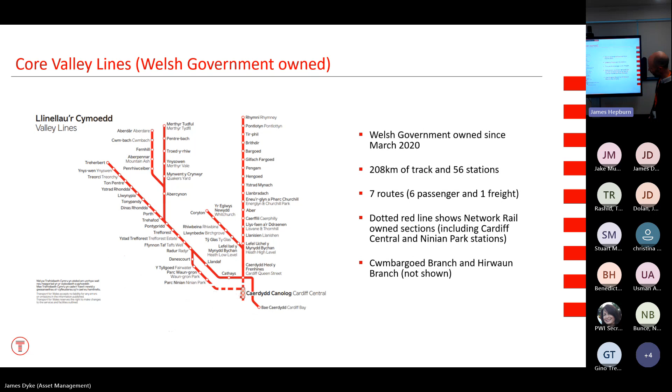So obviously managing earthworks is mainly about maintaining their stability fundamentally. And the 3 main threats to that stability could be summarised like this. 2 of those are obviously water. You could argue 3 of them are. Perhaps the main external threat to the railway from third parties is mainly around drainage inflow and management or otherwise of incoming drainage.

But on top of that, obviously there's climate change. Not going to go too much into detail about that, but I suppose the concern with climate change is that more extreme weather is going to result in more rainfall fundamentally.

So there's that, but there has also recently emerged a body of research funded by Network Rail and other asset owners that says that increased seasonal fluctuations of temperature will drive greater fluctuation in groundwater pressures, and that greater seasonal fluctuation in groundwater pressure will actually cause the materials themselves to deteriorate and weaken over time. So climate change acts to amplify the forces that drive instability, but also to diminish the forces that resist it. The soil strength, essentially.

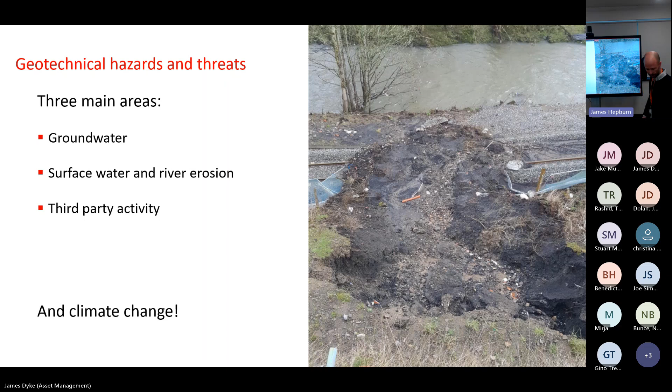So obviously it rains a lot in the upland areas of Wales. TFW's 1,500 odd earthwork assets are all going to be exposed to waters trying to get from the upland areas to the rivers, and they've got to cross the railway to get there. So, we don't necessarily have a huge range of geotechnical problems, not like you might see in other bigger regions, but the extent of our asset that is affected by water, and is vulnerable to the instability it drives, is quite wide.

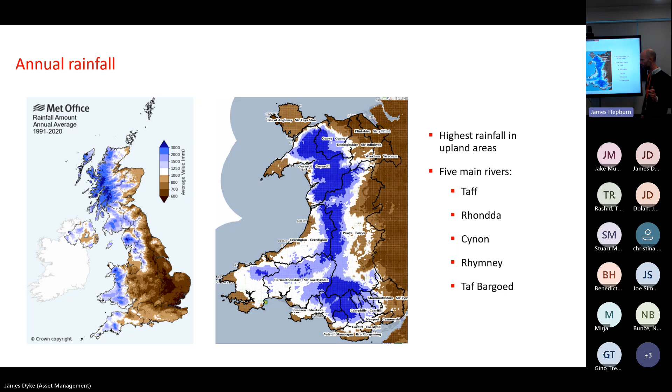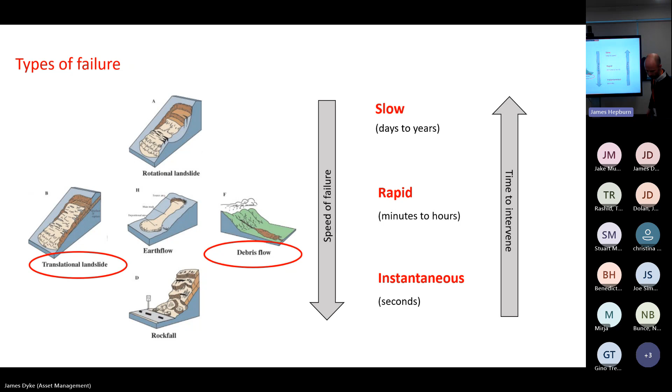So obviously the main threat is water, but understanding where that threat exists is one half of the problem. The other half is understanding which of your assets are most vulnerable, really. So in turn, when we think about vulnerability, we're interested really in what's the stability of the earthwork. In design terms, we assess stability using soil mechanics theory to determine a factor of safety, and obviously that requires an awful lot of very expensive data, which is obviously not something that's within reach.

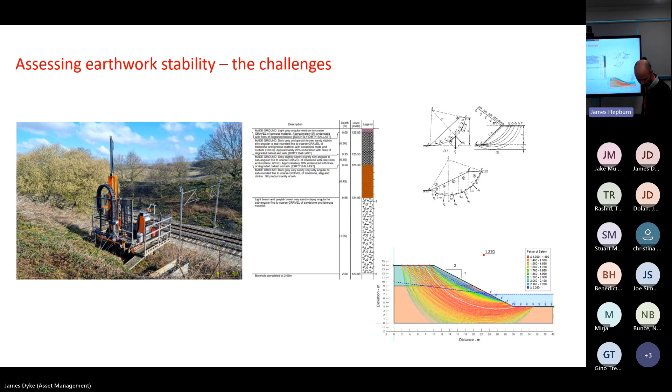So that's really the challenge. So the big difficulty really in understanding what's below surface, and therefore how your earthworks are going to behave, is one that's compounded by the variability that exists within the earthworks.

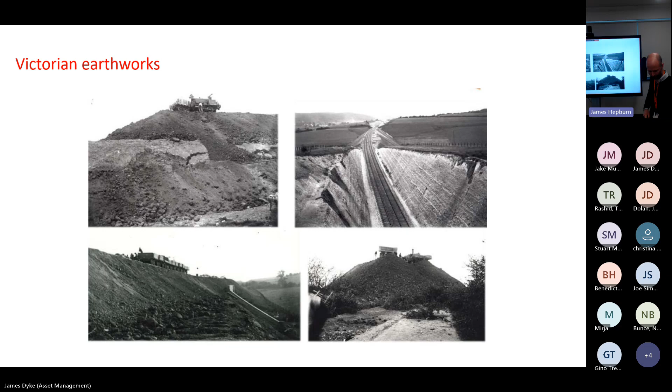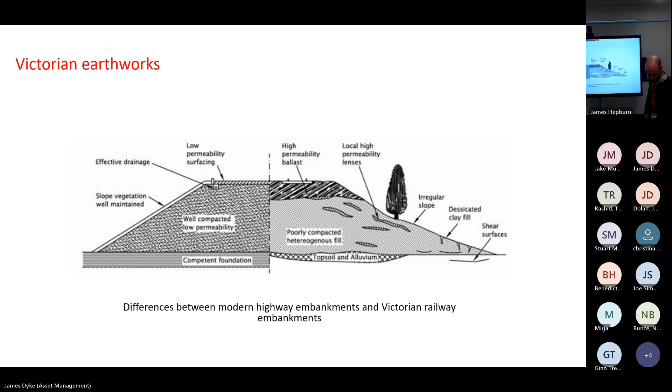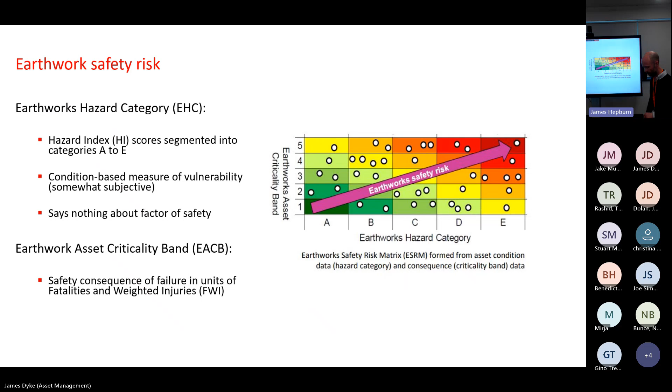So earthwork hazard category is determined or calculated based on an asset's characteristics, its attributes. That might be fixed attributes, the geology, the slope angle, the height, fundamentally the two most important determiners of how stable your earthwork is. But obviously then there are other condition-based factors that come into it, the ones that are most indicative of something being fairly problematic. Movement indicators, and obviously you've got drainage there. It's there for a reason largely, to control either pore pressures or surface waters. An indicator that there's a threat there.

So each of these attributes then will score according to how important they are as precursor indicators of failure. And there's statistics behind this in how important these are statistically in the failure record. From that data we determine the weighting that each parameter is given, and then the earthwork is scored accordingly, and it puts you somewhere on the scale A to E, from best to worst condition.

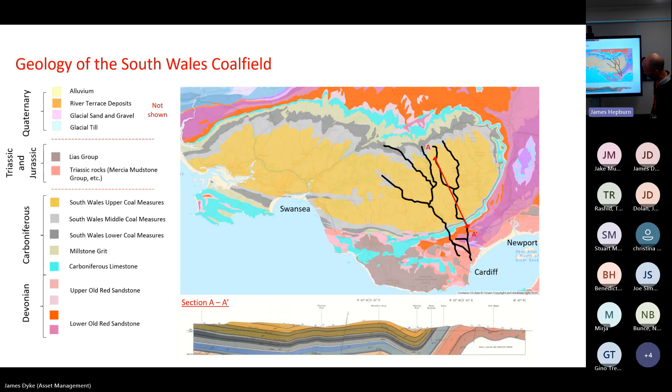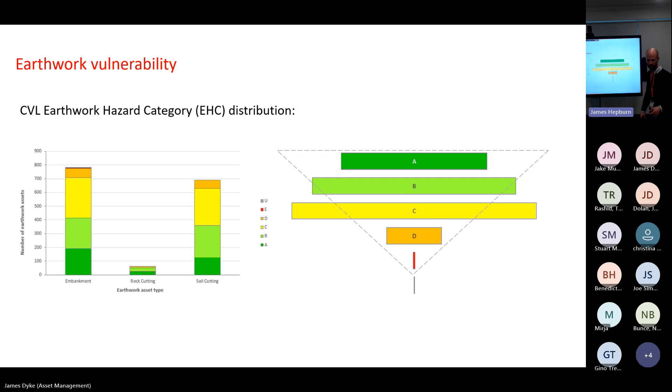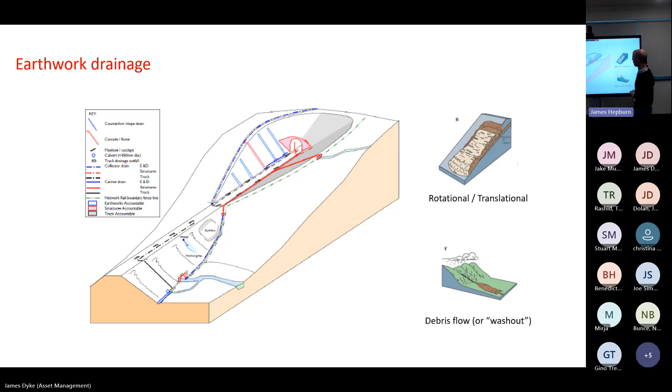Drainage is vitally important. If you've got drainage in place on your earthwork, then it's generally an indicator that there's a vulnerability there. All of these drainage features here are going to be pretty critical for controlling stability and limiting the risk of this type of failure happening. We've got crest drainage, which would partly be to control groundwater and intercept surface water, counterfort drains on the slope to limit pore pressures, and under-track crossings, which are fairly critical to the integrity of your embankment. And if it's sidelong ground, as exists mostly in the valleys, the upslope drainage at toe level would be pretty important as well. So just a few examples of the sorts of problems that we've had, perhaps before we took the asset on in this case, but since as well.

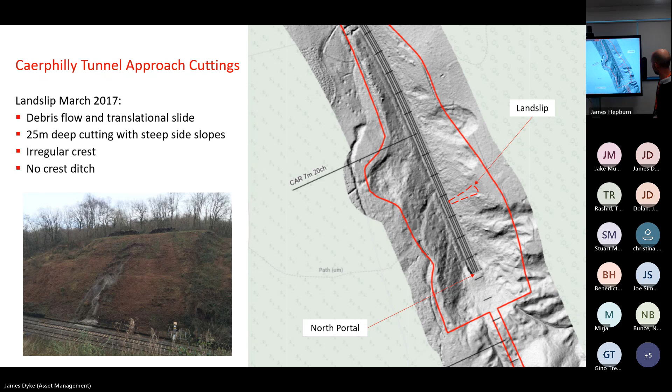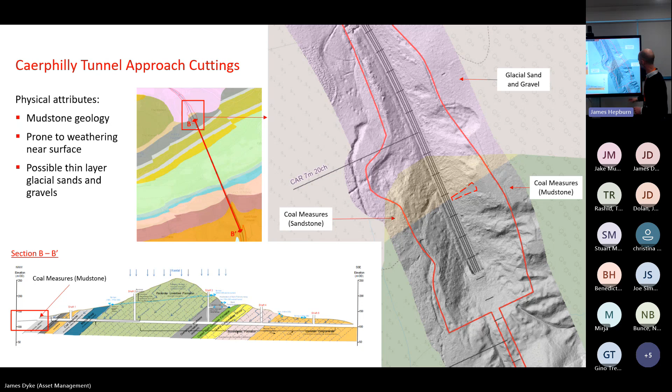Mudstones are quite prone to weathering at their surface, and that's likely been a major factor in being vulnerable to this type of failure. We've also got some sands and gravels coming in here, possibly a thin layer over the top of the underlying geology there.

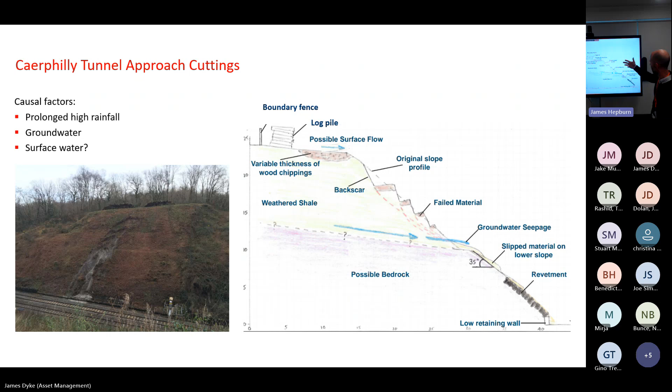The other thing to notice is these log piles here. It may not be a factor at all in this slip, but if there was a uniform flow of water towards the crest line from neighbouring land, you might think those logs could act to funnel water towards the middle part of the slip. It could just be coincidence that the slip coincides with that. But it's an indicator of other factors at or beyond the boundary that are often critical to these things happening.

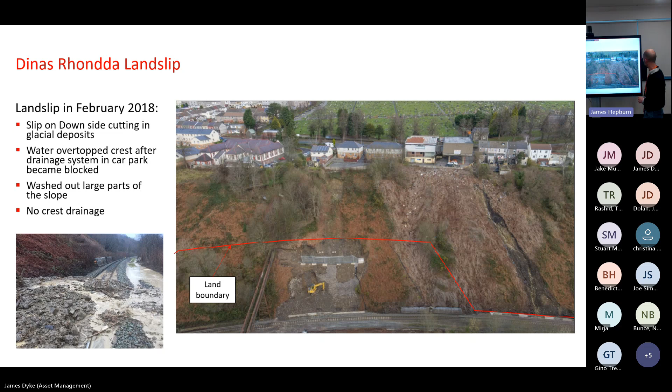The other thing, when we picked this up after we took on the asset, to try to assess the site and get a bit of an understanding of what residual risk there was after the emergency work, we could see that there were some overflows from these gullies in the car park right down to some chambers in the cess here. Sort of temporary measures really. So obviously something that, if it is needed longer term, needs formalising in some way.

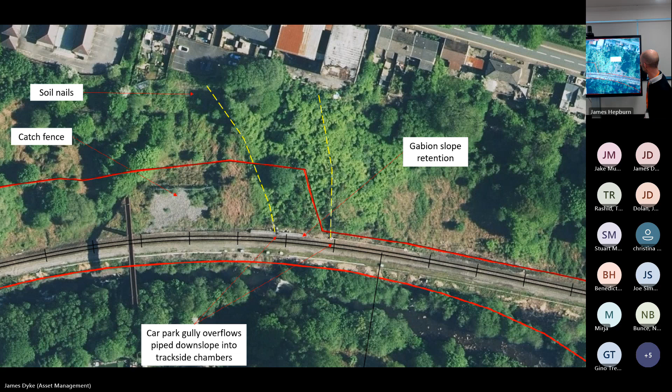So yeah, this clearly is still a difficulty in managing this site. As we looked more closely at the LiDAR, you can see that there's a sort of herringbone pattern on the middle bit of the slope there, which when you look back at early 2001, I think this aerial image comes from, you can see that this is a system of counterfort drainage, which we didn't previously know about, and wasn't in the asset records. May well date from long before 2000, 2001. Certainly doesn't look particularly new there.

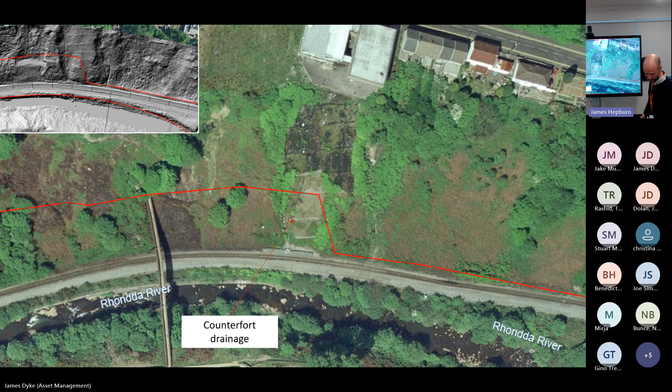So, you know, obviously they were put in for a reason. And you can imagine that drainage was, certainly at the time, considered fairly critical. One of the concerns with that type of drainage is it has a very limited lifespan. There's recent work done by the Transport Research Laboratory into how long these things can be considered functional, even with regular maintenance.

And they found that really refurbishment or replacement is necessary by the time you get to 25 years. And it's already been in that long, quite likely, with very little maintenance in that time, given that there was no record of it. So, yeah, that's obviously a concern about how we manage it going forward.

One of the important things to consider with counterfort drainage in terms of design, and also with maintenance, is what's its design function? Is it there to manage groundwater, or is it there to intercept surface water as well? You can imagine, given the nature of the site and the fact that you're having to protect against instability driven from things happening outside the boundary, it might be there to intercept surface water, so it's more important that it's kept free of vegetation, cleared of all the vegetation debris, so it doesn't get clogged at the surface.

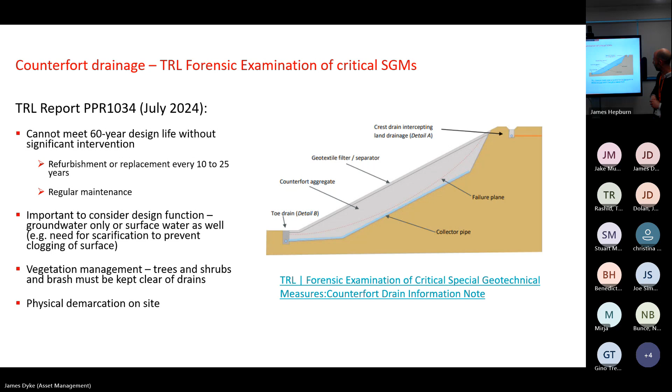This is a slip that happened in May last year. The first of May, after a prolonged period of rainfall, the first train out from the depot from Rhymney passed the slip. I don't think it had blocked the track, but there were lots of trees down with it, and the train struck a tree on the way past and damaged the unit. But thankfully, it wasn't too severe.

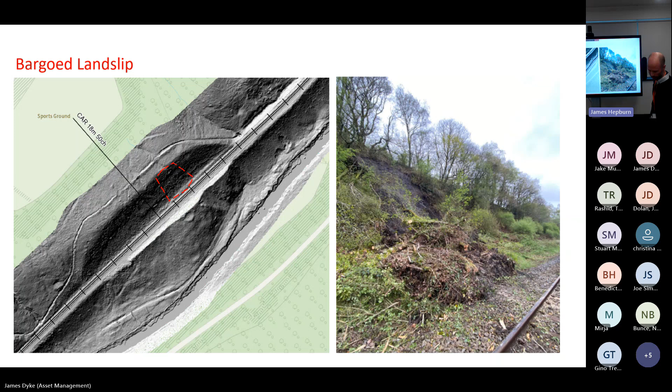The debris was cleared away, and an emergency speed restriction was put on once this crest ditch here, which you can see was hand cleared, and some barriers put out. Or rather, I think the speed restriction was put on after the debris was cleared, but it was lifted after that work was done, just to try and get the ditch flowing and to get some temporary restraints in place.

So, having a look again at the top of the slope, this crest ditch here seems fairly well defined in places on the LiDAR, but in others, really not. It's really badly degraded and heavily overgrown. Lots of trees growing out of the ditch. Again, this wasn't in the asset records, so quite likely it really hasn't had maintenance. Is it a ditch within the railway boundary? It was, yeah. The boundary is crossed just at the back of the ditch there.

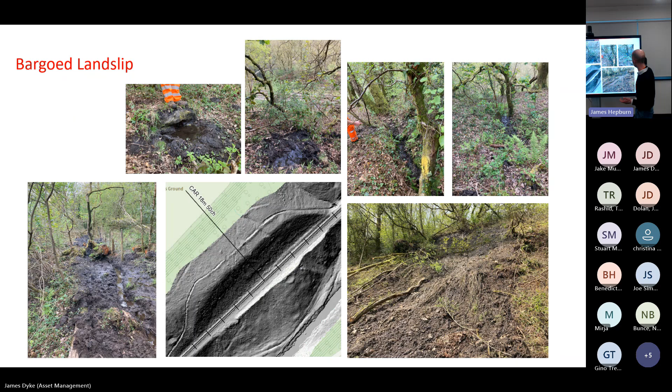We can see there's an incoming watercourse there. The intention is for this ditch to intercept that flow, but you can see that linear kind of feature extends beyond it. So there's been some overtopping there, and not just that, but there's been some quite heavy seepage below the ditch as well. So it might not just be a ditch overtopping; probably there's something else coming in as well that seems to have caused it.

So, obviously, with the importance of drainage, trying to improve the asset record of drainage, we tried to do a bit of work looking through all the records to try and identify stuff that maybe isn't formally registered as a drainage asset, to see if ultimately we can get it into the records. We've also looked at the LiDAR data, the images you saw before are quite useful for doing that, OS mapping, and just going through all of that data.

We think we've been able to identify these numbers of earthworks with suspected unregistered drainage, the dark blue ones being ones with drainage that we already know about. So, that's roughly 40% of what we think is out there that is unregistered, which ties in very roughly with what Network Rail have estimated before.

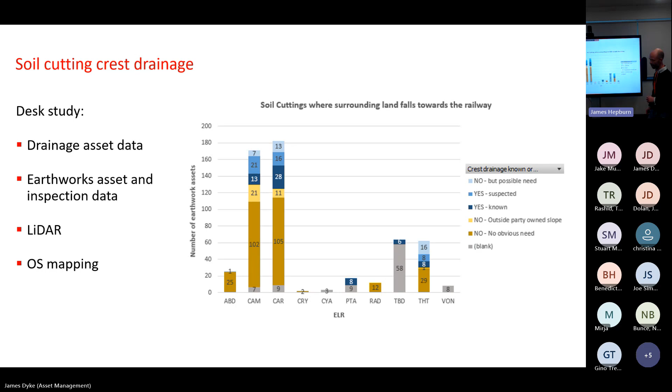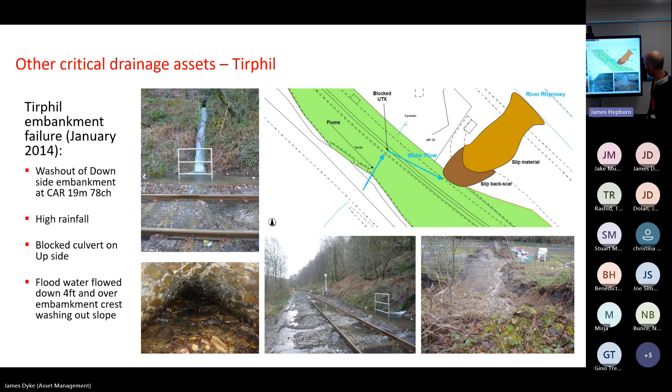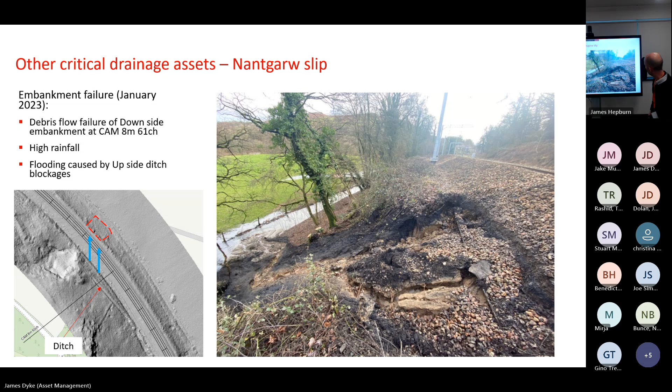It's probably the water's come underneath the track through this ashy layer to cause the failure in the underlying sandy, silty embankment fill. The cause was this ditch here becoming blocked, and that overtopping the ditch, flooding the track, and water obviously made its way through. So again, a critical drainage asset that had become blocked.

Something that our maintainer, Amey Infrastructure Wales, is doing some good work on at the moment, is looking to monitor some of these critical drainage assets, so that we've got some warning when debris builds up on screens to inlet chambers and culverts and so on, so we can go out and clear them before there's a flooding problem which can cause damage.

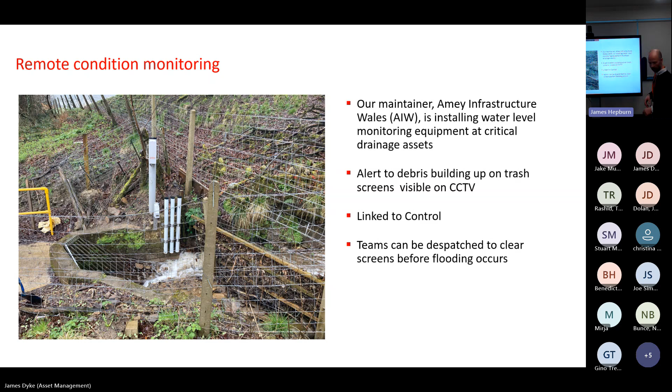So this equipment monitors the water level, but gives you 3 triggers according to whatever level you want to set. Red, amber, green type of alert. That's linked into control, and then switches on a CCTV camera. You can see what's going on, and the teams can be dispatched then to clear the screen before something occurs.

Something else that we're looking to try and do is to see if we can get even further, earlier warning of what's happening. So, once you understand the normal flow conditions within these chambers, within these inlets, is there a pattern, or can we relate that to the actual rainfall that we've seen, and then make predictions about what's normal, and then anything that's outside of that, you will have an alert ahead of time before maybe it reaches a certain threshold on the monitoring equipment.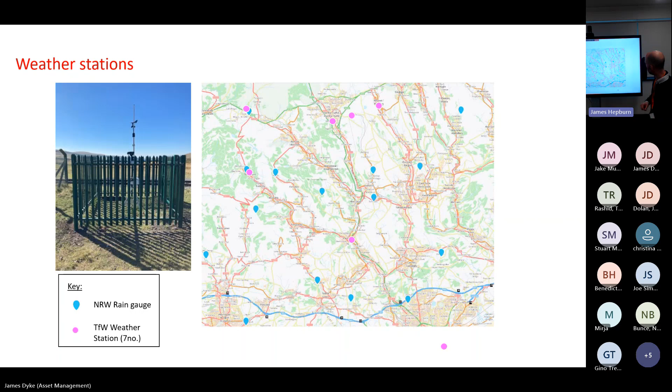One other thing that we're hoping that would be useful for is to provide us some data that we can compare with the occurrence of landslides, so that if we understand the amount of rainfall that's accompanied a landslide, we can understand the conditions in which landslide risk is increased, and that becomes quite useful for adverse weather planning and so on. Welsh Government are doing an exercise with the South Wales Trunk Road Agency doing just that, to see if they can come up with some threshold levels to inform their route stewards about increased landslide risk. And this is the opportunity perhaps for us to develop that in a way that might be useful to us.

So there's surface water, groundwater, problems on earthworks, and this is predominantly not really an earthwork problem, but I thought it was quite interesting, kind of illustrative of a problem that does exist in earthworks as well. So one of river erosion. This was some bank erosion that happened below Quakers Yard Viaduct, which you may know is a six-span masonry arch viaduct dating from the 1840s.

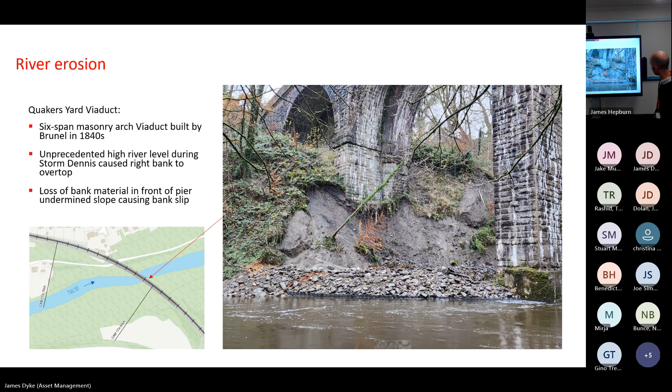Storm Dennis resulted in some unprecedented high river levels, and that caused the bank here to overtop. You've got this plastic sheeting here that was used to protect the bank, and it's washed out the corner of the bank here. The loss of that material has undermined the slope, which has caused a slip further back up the slope. So obviously here the concern is, does this pose a risk to the viaduct foundation? So looking into the records, the first thing we were concerned about is the foundation on rock.

Now all of these are, but this one has obviously been taken much deeper during the original construction of the 1840s viaduct here. This was before it was widened in the 1860s. But one thing you can see from here is that the river used to flow around the back of P2, and there are these octagonal piers that are designed in a way that relieves that flow around the back.

But yeah, I think the concern really is with this foundation, in that this one isn't on rock, it's on hard gravel, albeit close to bed level, it's still not quite on rock, it seems, according to a paper by Samuel Downing that was written soon after the original construction.

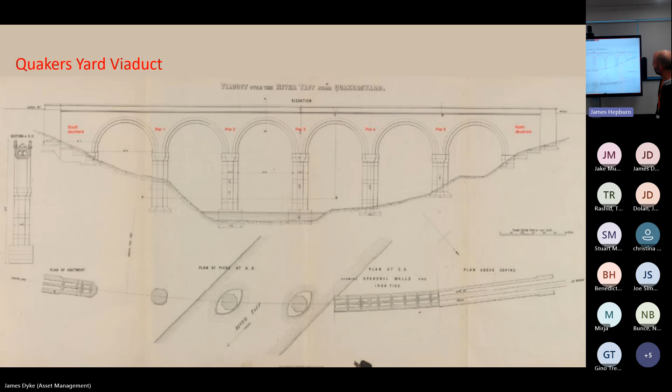So fast forward to the 1860s when the viaduct widened. I think you can see that the river no longer flows around the back of the pier here after it's been widened. And it's now been filled with all this debris that appears to have just been spoil taken from the approach cutting, and the approach cutting was widened.

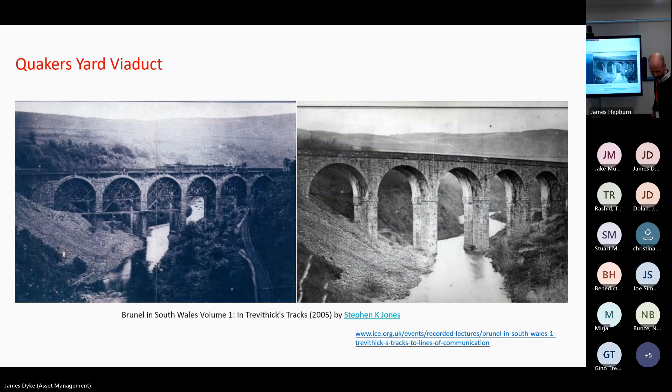So when you map the 1840s ground surface onto the current ground surface, you can see that there's this large build-up of material on the slope, and it's largely that material that's been lost by the bank erosion here, with this hatched area having been washed out and that then sliding down slope.

So not something that was likely critical to stability of the pier, but there's clearly an erosion problem that needs addressing, and it's something that we're in the process of addressing. I don't have any further information to give you on that. Just a little bit report.

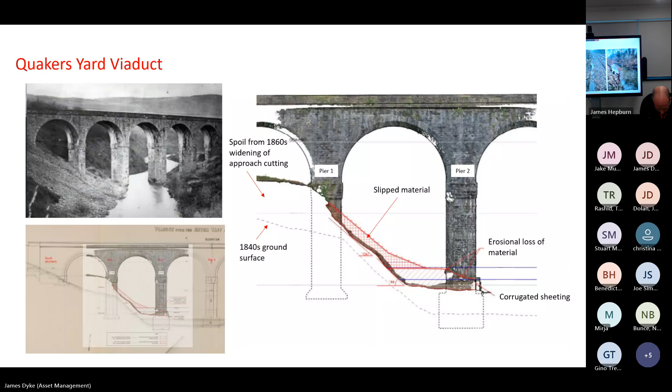Another example, again, river erosion problem, but in this case, not untypical with the railway on embankment right next to the river. This is the Abercwmboi coking works on the Aberdare branch. It's obviously very steep at the embankment shoulder here, not much left of the cess. When you look at the bank, you can see it's quite prone to slumping. It's a very sandy, silty, alluvial material.

So, it's very prone to erosion. It's a fairly robust protection, I would have thought. And the other challenge of in-river working in the valleys and engineering to provide protection against river erosion is the energy within the river systems is so high that often it limits the options you've got available, especially if you're looking at more sustainable methods. Obviously, it's hard to avoid steel and concrete really.

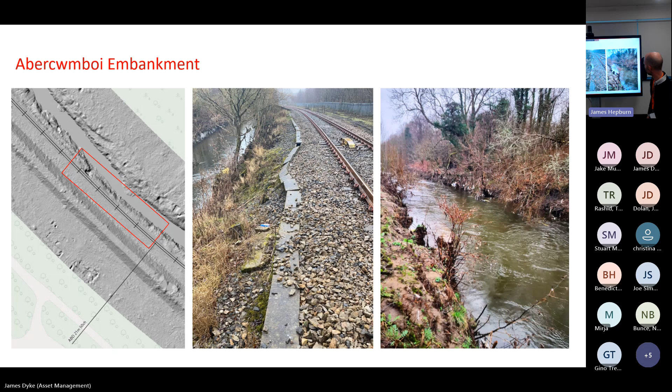Obviously, we've not just got embankments on riverbanks, we've got embankments set back from riverbanks in areas that are nevertheless prone to flooding. One of the other things we're looking at is to work with Cardiff University to create a predictive flood model, an early flood warning system, but also a model which will allow us to model some future climate change scenarios as well, to understand future risk, how much of our network is going to be exposed to flooding, to erosion problems. All of that will hopefully be useful.

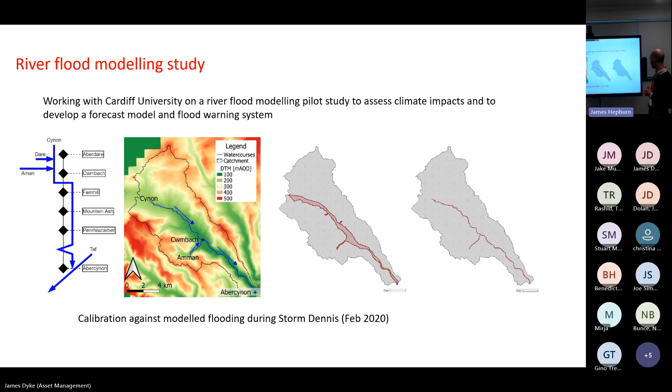So this is a bit more about the modelling work and how the model is developed. Cardiff University has done a pilot study for the model by creating a version of a model that's calibrated around Storm Dennis, looking specifically at an area that probably floods most heavily, the Aberdare branch. And this is the model sequence recreating Storm Dennis. The idea is that that could be used to calibrate a model that could be developed and rolled out more widely.

That's it. Right, thank you. Okay. Are there any questions online? Not yet. Okay. Right, any questions in the room? Alex?

If you listen to my accent, it's not quite Welsh, it's Australian. I've had my fair share of floods, being from Queensland. You mentioned before the risk of not knowing the assets which were built, and then not knowing the condition of assets that are known, and also the risk of climate change. Which do you see as the bigger risk, the assets which are right there, doing a good job today, and then they will fail?